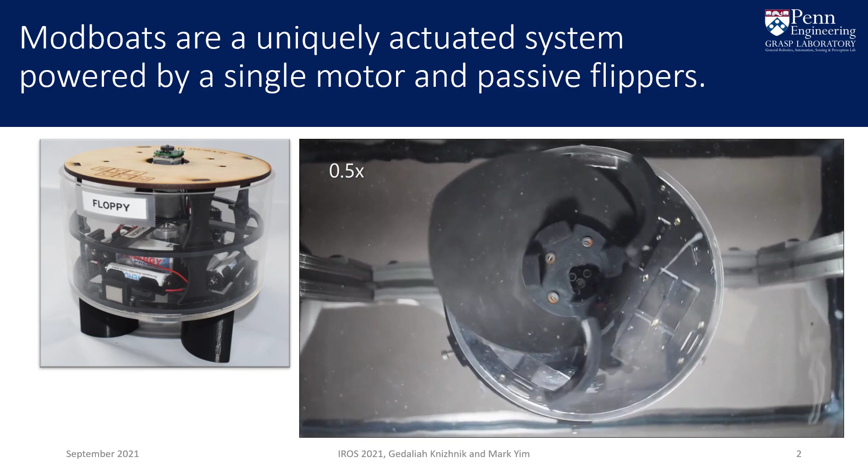The oscillating swimming robot we use is called the ModBoat. This is a single motor swimmer that uses conservation of momentum and two passive flippers to propel itself and turn. You can see the core propulsion mechanism in this video here. The motor spins the bottom body relative to the more massive top body, and the oscillation causes the two flippers to open in a paddling sequence. Modifying the oscillation parameters allows the paddles to create both propulsion and steering.

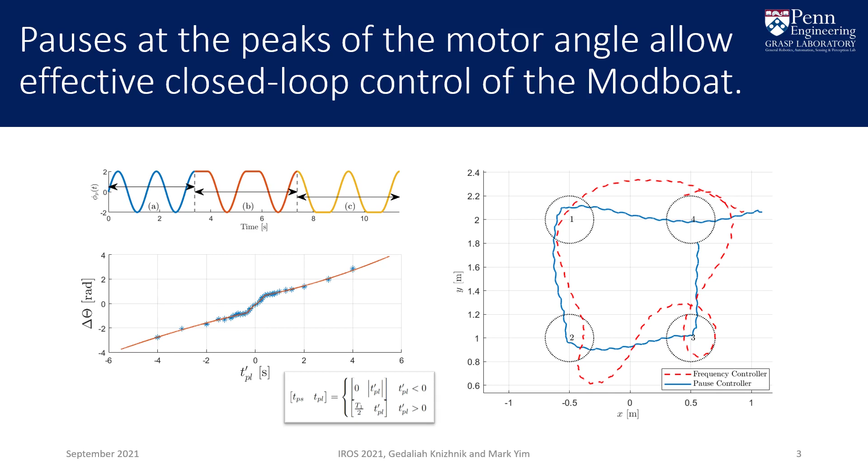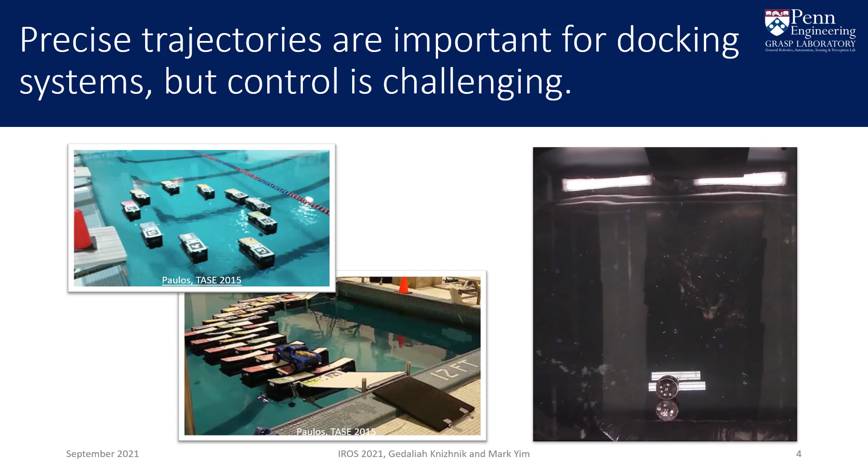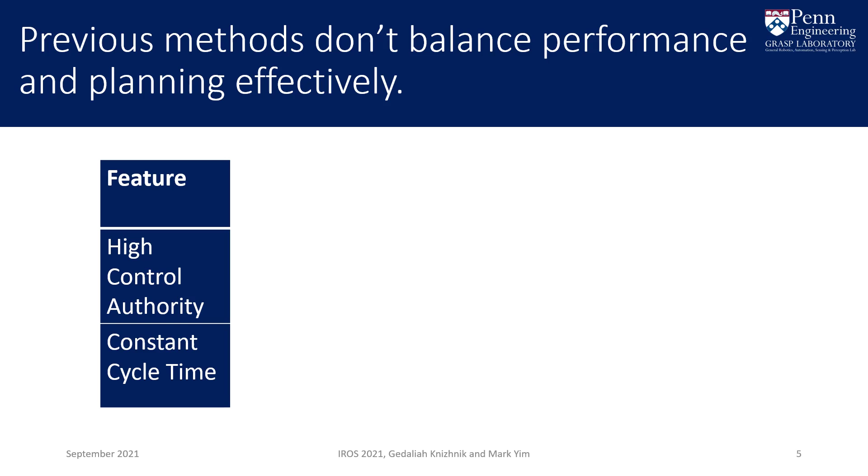So we have two methods that work at varying levels of effectiveness to control ModBoat modules, but both methods have significant weaknesses that make it difficult to move forward with them. Differential thrust, which shows poor waypoint tracking performance, suffers from very low control authority. But on the bright side, the oscillation cycles have a constant length, so planning can compensate somewhat.

Inertial control, on the other hand, has very high control authority. But because the control variable is time, path planning becomes incredibly difficult. What we need is a controller that combines the benefit of these two methods, one that has high control authority, but also a constant cycle time.

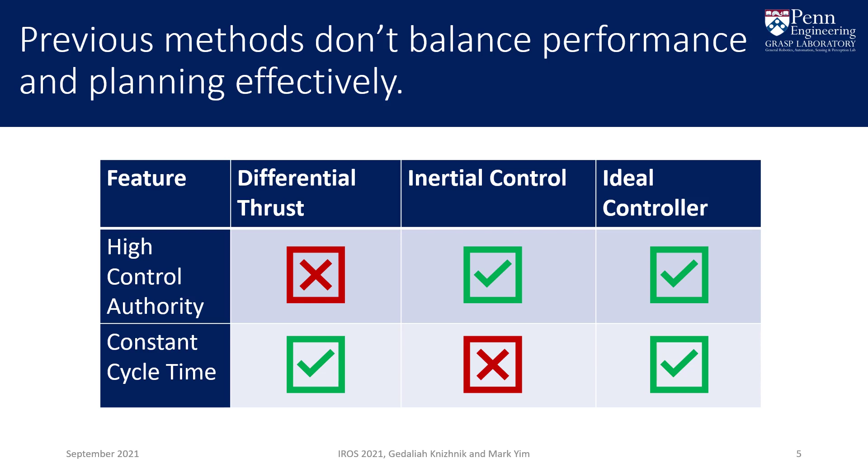These robots have shown success with using a variety of torque-based continuous feedback laws that track velocity and an average heading. Although the ModBoat's propulsion mechanism is different, flippers rather than a foil, there is reason to think that the same control strategy would work.

A critical difference needs to be noted, however. The foil-shaped robots rely heavily on a no-slip condition at the tip for their dynamics. Although the ModBoats have a foil-shaped tail, its thickness is negligible, and so no no-slip condition can be applied. This will have important ramifications later on.

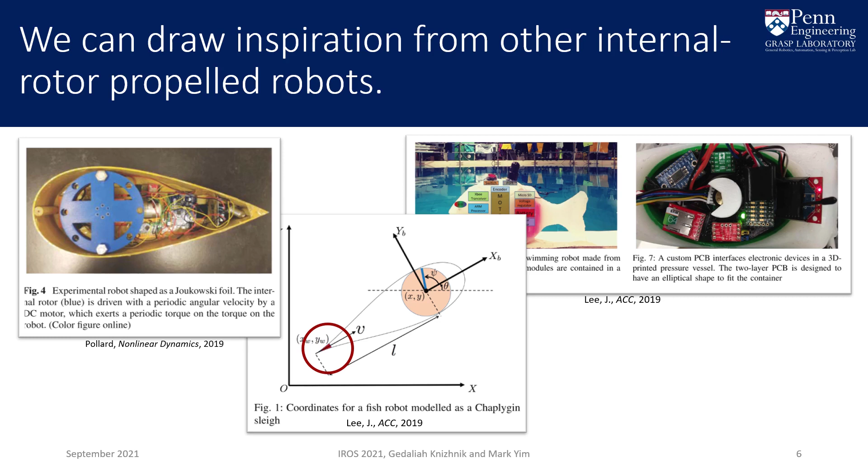This turns out to be the equation of a damped nonlinear pendulum, which we know can be forced to swing around its down direction. Since the down direction is defined by the reference heading theta r, we can point the oscillations in any direction, and hence the thrust vector.

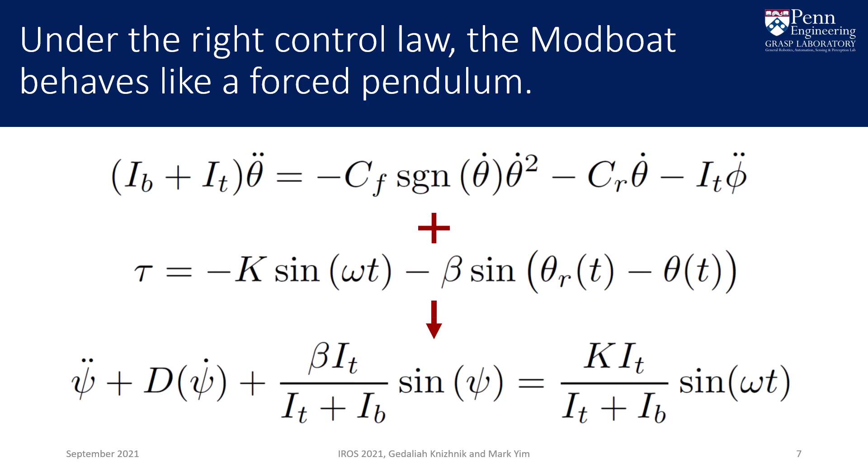Although the control law has three constants, beta, k, and omega, this pendulum perspective demonstrates that there are really only two. For best results, the pendulum should be forced around its natural frequency, which is influenced by beta. Since in practice, I sub t is much greater than I sub b, we let beta just equal omega squared.

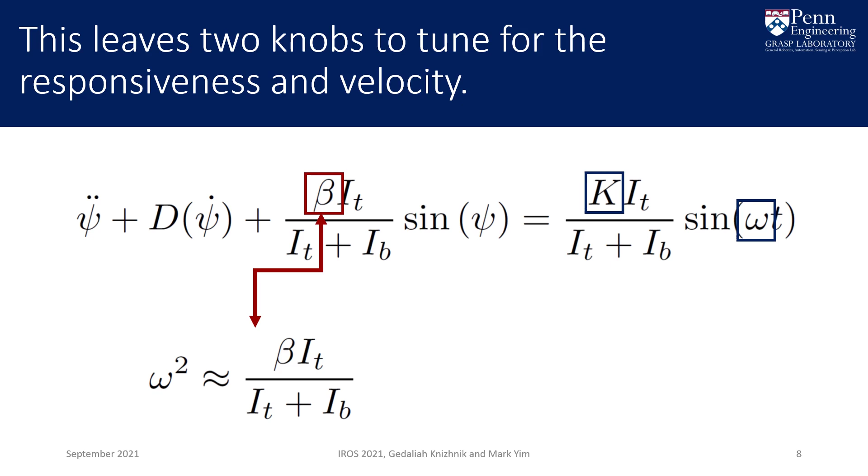This leaves two knobs. Beta determines the frequency of oscillation, and hence the responsiveness of the controller. On top of that, k loosely controls the amplitude of oscillation, and therefore the swim velocity.

We can simulate the resulting equations of motion and find pretty nice behavior. The tail angle oscillates around the desired heading and responds within 1 to 2 seconds to a step change in the reference value. This is very promising for using this controller for single module control.

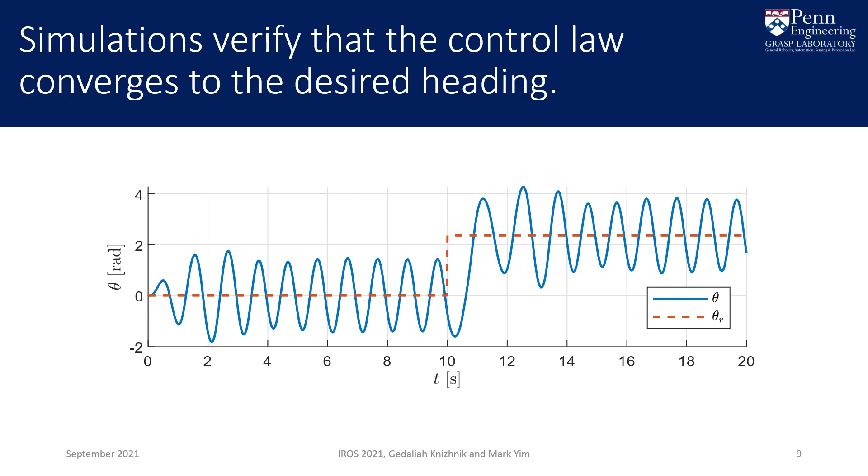Now we come to the ramifications of the lack of no-slip condition I mentioned earlier. A no-slip condition has the effect of forcing the thrust direction to equal the direction of travel. Without it, controlling thrust alone is insufficient.

In this plot, we see that play out. The mod boat is tracking a reference heading of 0, going to the right, but around the 1 meter mark, I give it an upward shove. As you can see, the resulting trajectory is nowhere near the desired direction, because although we continue to thrust to the right, we're still drifting up. The trajectory would settle eventually, but we don't have that kind of space or time.

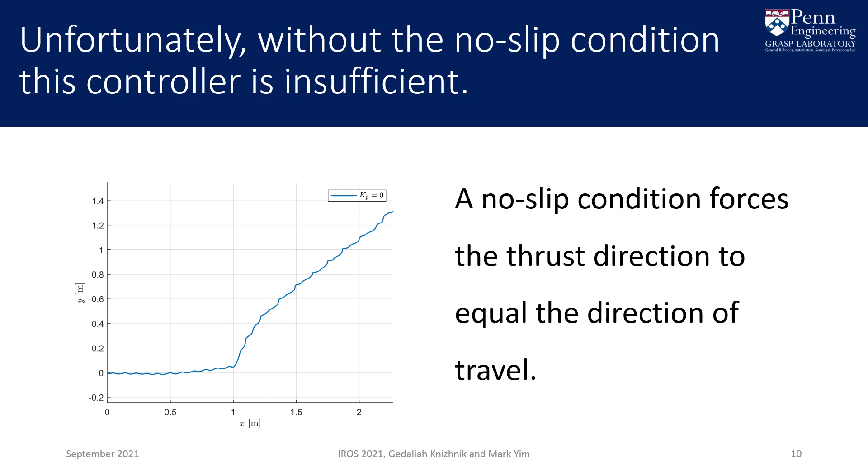We can compensate for this effect by adding a travel direction layer to the controller. Instead of commanding the desired direction, we use it as a feed-forward term in a proportional controller. The second term here considers the difference between the desired and observed travel direction, calculated as shown, and uses it as a vector error term in determining the actual commanded reference heading.

You can see the major difference in the orange trajectory. As soon as the disturbance is applied around the 1 meter mark, the thrust vector swings down to cancel out the observed upwards velocity, returning the travel direction to the desired value. We're able to apply multiple disturbances, and the velocity recovers quickly in both time and space.

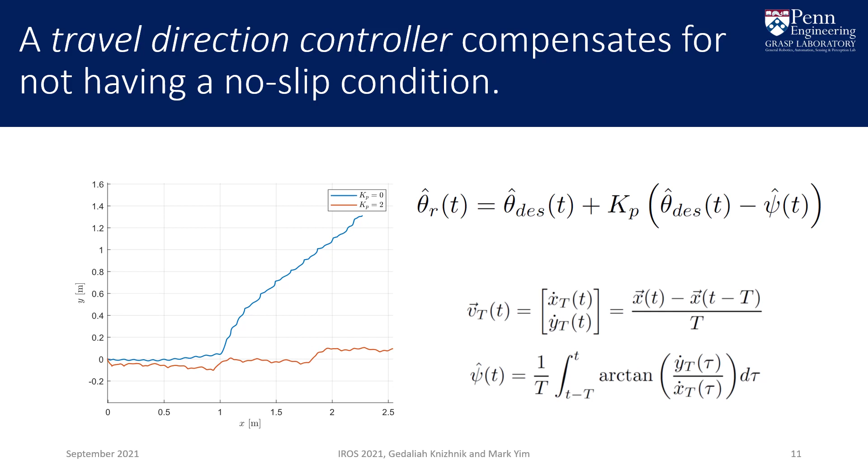Once this additional control layer is added, it turns out that lacking a no-slip condition has the effect of significantly increasing maneuverability, since we need very little distance to change the thrust direction.

Here's some trajectories comparing the thrust direction controller in blue with the prior best inertial controller in red. For the 1 meter square on the left, we see sharper corners and straighter line segments, and the new controller can even execute a ½ meter square, which is 3.3 body lengths for reference.

We see the same effect when executing linear trajectories, as shown on the right, where we get much sharper and shorter turns. The inertial controller also shows significant deviation from the straight line on the return trajectory, which the thrust direction controller does not.

One last thing to note in this comparison is that the waypoints shown here are 0.1 meters in radius, but the inertial controller tests had waypoints 0.2 meters in radius. So the thrust direction controller actually has much less warning about the incoming turn, but still does much better when performance is considered.

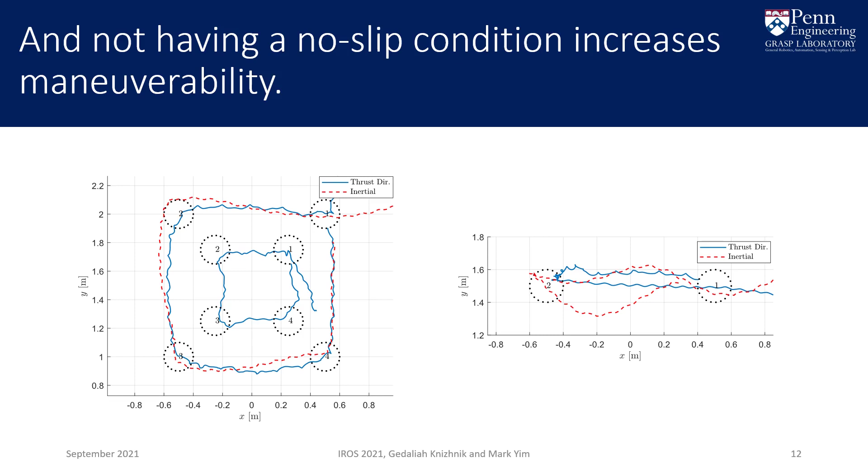The biggest problem left with this control method is the canonical saturation problem. The top body is essentially functioning as a reaction wheel in this setup, and when the reference heading changes, we get unbalanced torques. The top body thus spins faster and faster, losing control authority as it goes. How could we possibly deal with this?

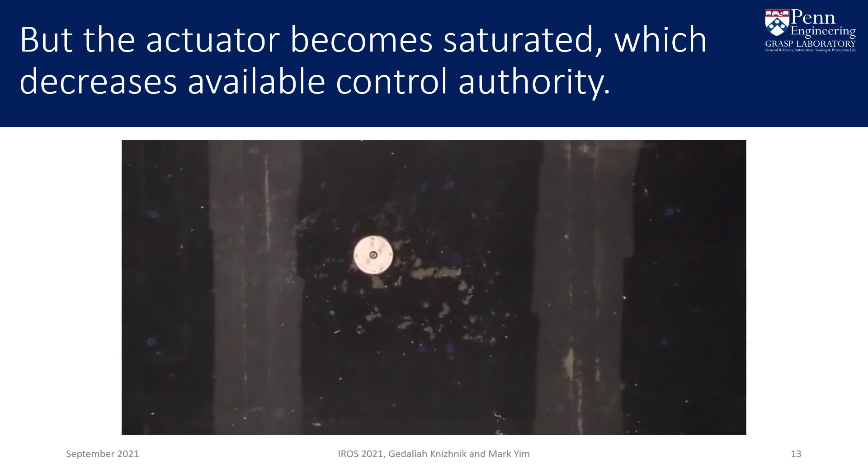The solution is to leverage cyclic orientation. A left turn by pi/2 radians is equivalent to a right turn by 3 pi/2, but has the opposite transient effect on the actuator. Smart choices of reference heading can therefore keep the angular velocity bounded.

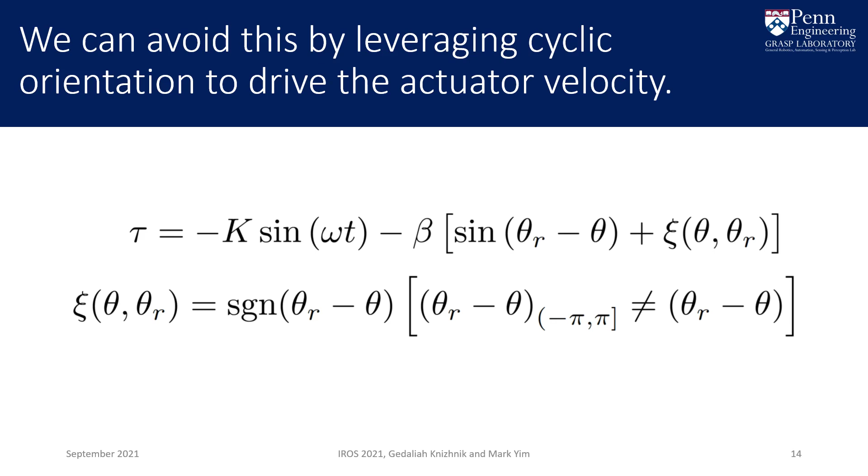The issue is that the controller, as written, cannot distinguish between equivalent angles. So we introduce a desaturation term as shown. We compare the angular difference to its value when wrapped to minus pi to pi, and this differentiates between equivalent angles. This has the effect of overruling the sinusoidal tracking term until we are in range of the desired value, at which point it reduces to the original controller.

This works fantastically well. Here's a sample test, where we command an initial swim direction for 15 seconds, and then step it by either pi/2 or minus 3 pi/2. Both represent the same final direction, but result in drastically different angular velocity profiles for the top body.

So we can't drive the angular velocity to zero, but we can keep it bounded, which will allow us to maintain higher levels of control authority.

There is a minor cost to the trajectory when a non-standard heading is used, but it is negligible in the long run. To minimize it, however, we only activate the desaturation by either adding or subtracting 2 pi to the normal reference heading when the reference heading is already changing due to a new waypoint, and also only when the change would not already lower the velocity by its natural direction.

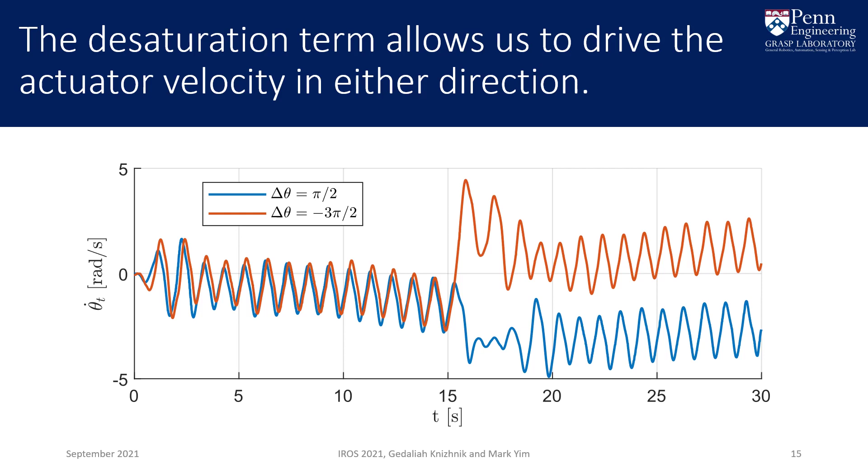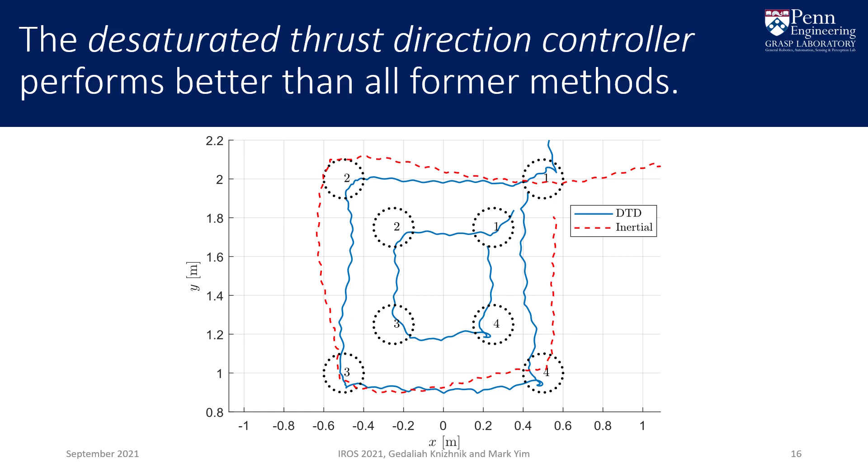Here, you can see the modboat executing the 1 meter square trajectory under the desaturated thrust direction controller. The overlaid waypoints are only approximate, but the trajectory is clear. Relatively straight line segments with sharp turns characterize the performance. You can again see the desaturation maneuver occur at the bottom right waypoint. The modboat moves back slightly as the actuator desaturates, but the effect on the overall trajectory is quite minimal.

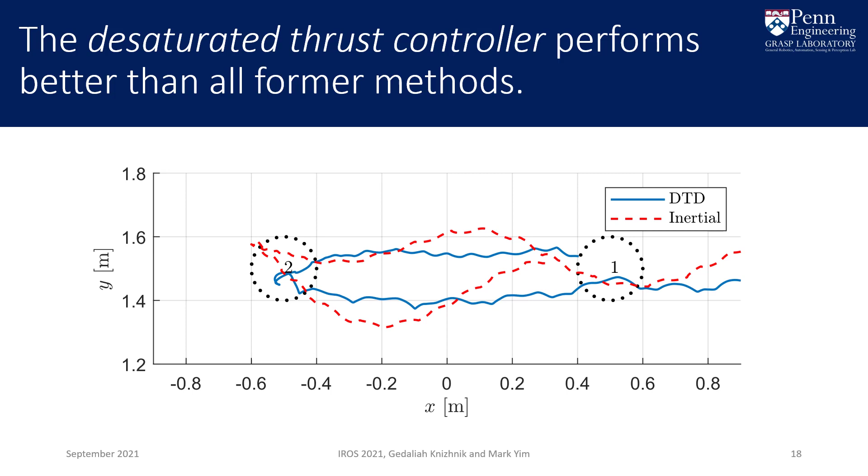One last thing to highlight is that the improved performance of this controller allows another maneuver. Simply by commanding a single waypoint, the modboat can station keep to within just over 1 body length. This is impressive considering that the system has only one motor and cannot actively control its paddles. Of course, more intelligent methods for station keeping could probably improve performance, but even this naive approach shows great promise for the system. Neither of our previous control methods could effectively station keep.